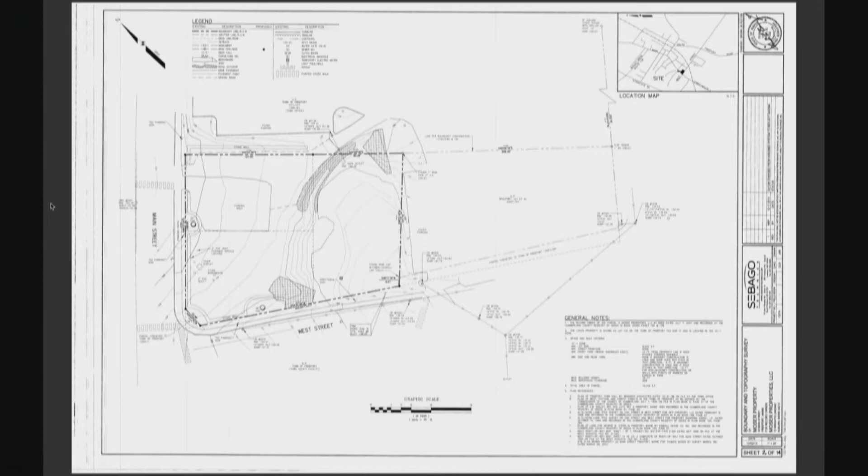There currently is no entrance off of West Street, but that's where we are proposing on that. So essentially we got some physical features shown here. Next slide, if you don't mind, Josh.

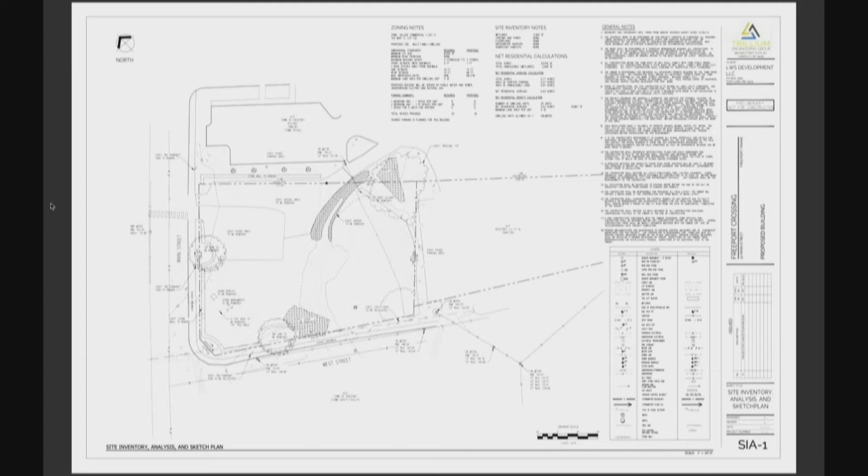So this is our site inventory and analysis sketch plan where we go through the calculations. We have our general notes, and again we're showing a little more features on this and going through those calculations that were really asked for this. But a lot of them, as Caroline said, don't really apply for this particular as far as open space. So next slide, please.

So what we're showing here is essentially the building, and we have the street presence that Paul was talking about. We are meeting the setbacks on the town hall side and the setbacks on the West Street side. Of course, we're meeting the setbacks on the Main Street side. We have some good connection points that go out to the sidewalk on Main Street, and we're also trying to get some connection point out to West Street.

We have our main entrance on the front corner down here, which we're trying to get a ramp, integrate that with the existing stone wall, and get access into our main lobby area. We also have the internal parking area and courtyard that is not really visible from either West Street or from Main Street. We're trying to hide that.

And of course, we have a sloping site, so we have everything level that's up on Main Street. And then it slopes as we come down, and we have kind of a daylight basement section here with an extra unit, and also some bike storage, some mechanical space.

We are utilizing some entrance points on the courtyard side, which is kind of the main entrance lobby area, and also to this portion of the building. This section of the building, which faces Town Hall, is essentially we're utilizing tandem parking, which is underneath this section, and then we're utilizing units on top of that. So the units essentially wrap on the three sides that surround from West Street, Town Hall, and from Main Street.

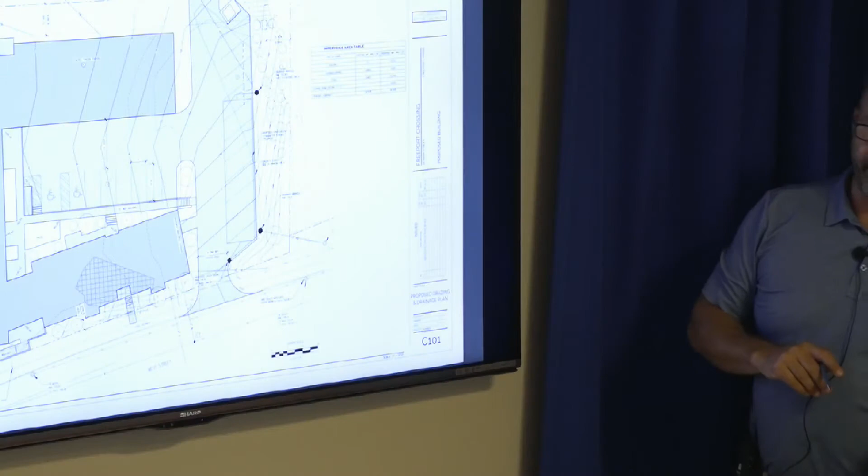The one-way access that we were talking about, we noticed in the report from Town Engineer Adam Bliss that an entrance permit is required. We've already secured that entrance permit, so we're in good shape there. It takes traffic away from Main Street, which is more congested than West Street, and it's really one-way traffic, which helps us out as far as stacking, and we don't have to worry about interfering with the light as much. It's really a left turn in, that's our biggest concern, but otherwise it's a right turn in for entrance, and then we go through that easement section, and be able to exit down and through the way we exit out Town Hall as we currently exist.

We do have parking and then some trash storage on this side, so that it's pull in and then back out and then be able to pull in.

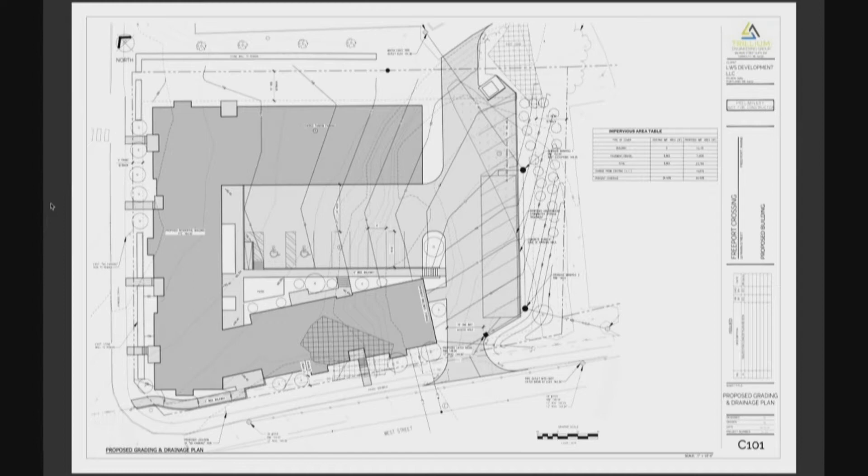We have some slopes here, and then, as we noted, we need some stormwater quantity and quality, so we're going to utilize some basically underground storage under parking and be able to connect into the town system. We're not going to release at rates that are over what they are now. We're going to discharge at the same or less rates than what we're looking at, and we are going to get treatment from that system.

We are doing utility connections essentially from West Street - water, sewer, electrical - and of course we're going to continue to work on landscaping for the project to meet those landscaping goals. So from a site civil impact, I think that kind of covers it. I'm going to turn it over to the architectural team.

There you go. It's on.

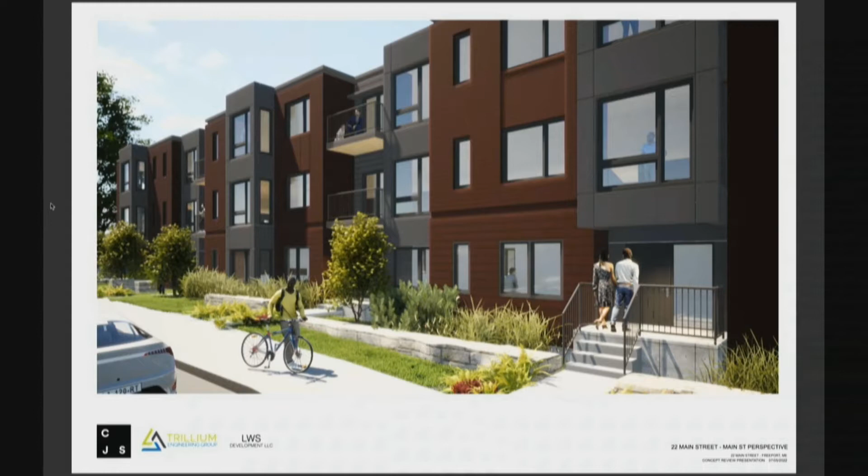This view is close up, looking down Main Street to the north. It's a view you would see from your cars, and from the all-important thing that Paul mentioned. We appreciate his commitment to walkable neighborhoods and dense urban cities, and that's what we're really emphasizing here, because this is the way you'll feel it. You will get some long views of it, but this is why we start here.

From an urban standpoint and urban design, which I have a background in, that street wall is all important in holding a corner. As well, it turns out that at this site, this really kind of marks an entry, and so we're trying to be very careful with that.

There's a trick that could happen here. There's maybe, in my opinion, a hole we could fall into quickly of emulating too much a historic downtown, and then it starts to become kind of corny and faux. Or we could go to the other side, and it starts to become too modern and stand out like a sore thumb. We're looking for a balance here, and we feel like we're on our way.

These are very beginning images. The balance we're striking here really has to do with not just building a long wall. You'll find a lot of 19th century buildings like this around Maine that are apartment buildings. They might be clad a little different, they might have a lot more ornamentation, but they have bays sticking out, and the roof lines jog in and out. You can begin to see that, in your ordinance, you rightly call out that you're looking for rhythm, and architecture certainly has a lot to do with rhythm. So that's what we're beginning to show here.

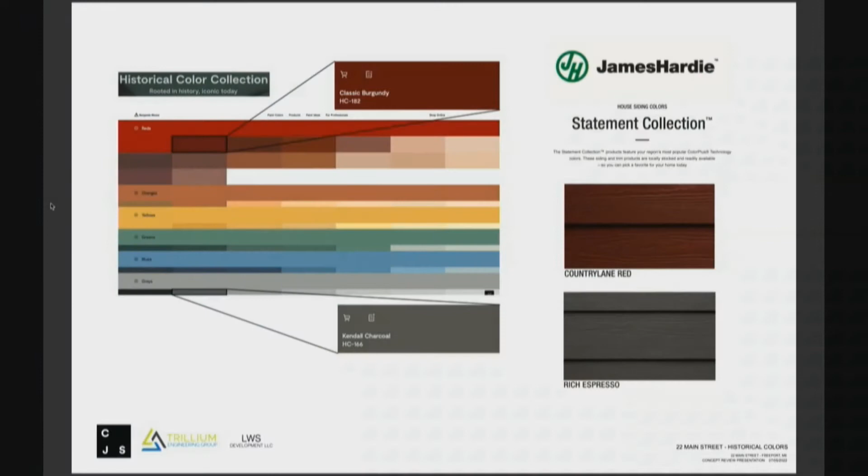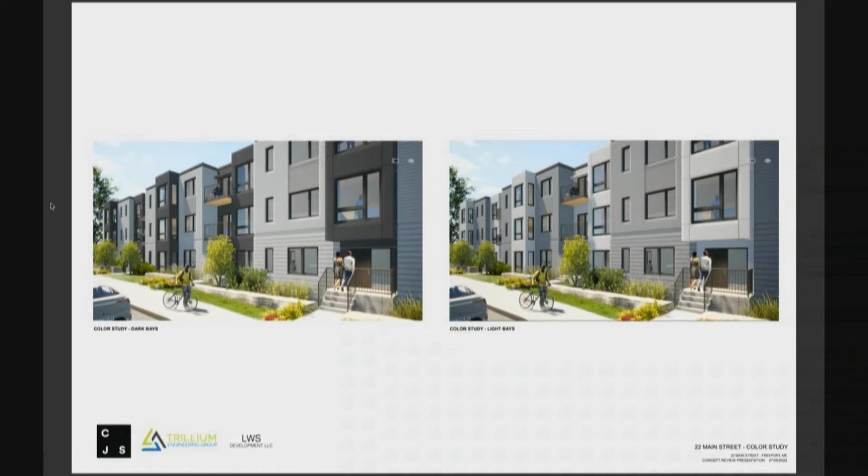This slide shows it all in gray, and we can have plenty of discussion as to what looks better. One of my favorite buildings is the Abacus building - it's brilliant white. I pictured that on this site, and that would hit you in the face really hard. I'm thinking it might be better muted rather than very foreground. White comes to the front, darker colors recede. From an urban standpoint, this is a background building, where Town Hall or L.L.Bean is a foreground building. So I'm thinking put some background colors on it that help it recede. Plenty more discussion to come about that.

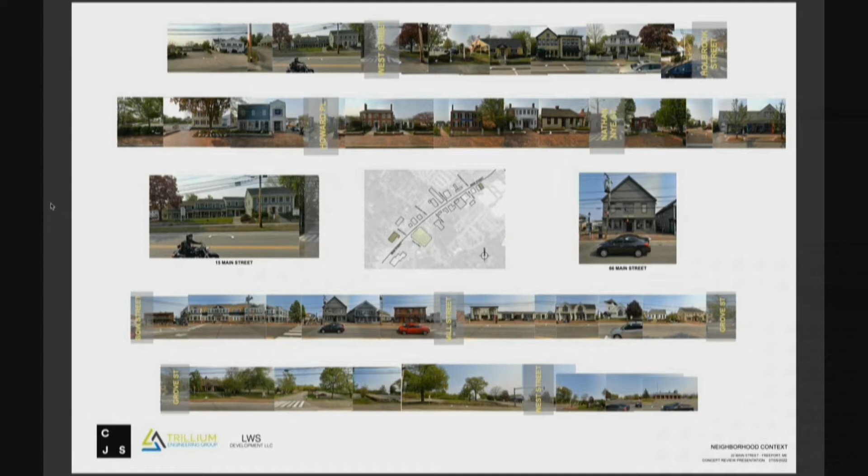Here's a study of what else is on the street. You can see historic flat roof buildings of 2 stories, and I believe some historic flat roof buildings of 3. You can see pitch roof buildings, and you can see these darker colors. This building - I don't know if that might be where Levi's was, I'm not sure what's there now - has the kind of tonality I picture, where it kind of fades to the back a little bit. It's easy to make it look too dark on the screen, but that's something similar. We've been studying the different facades and how that will relate to this.

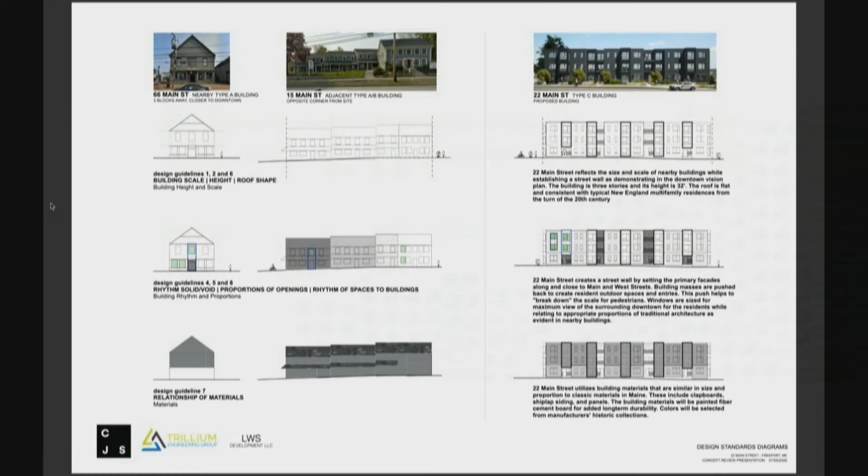Here's an architectural analysis of how we develop rhythm, how we develop the different types of fenestration, what's forward, what's back, how we break up the facades. So we're in that process, and feedback from everybody will help us continue that and make sure we're delivering a building that enhances the main street the best we can.

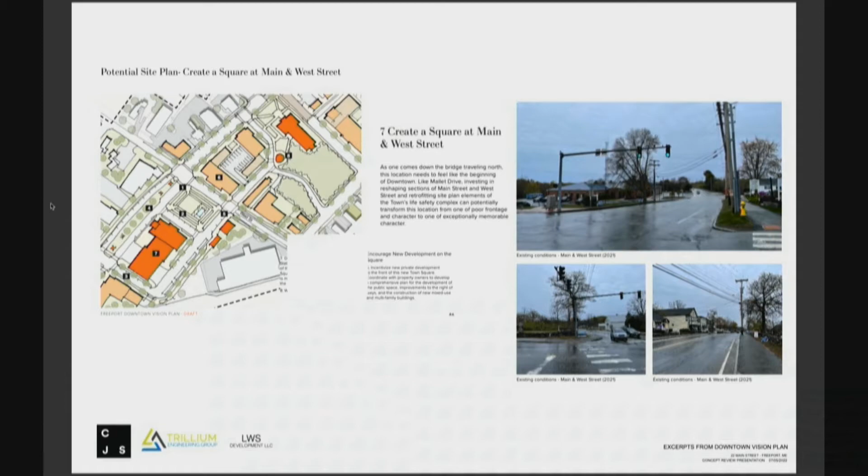This is from your own master plan, showing the building as an L-shaped building addressing a park, and we're aware of that and being careful of it. It's an interesting building in that there's only one facade that's really almost invisible from the street - 3 other facades will be quite visible. That's an interesting aspect that I think just makes it more fun. So, that's it.

And I'm assuming we're opening it up to comments. We'll look to the chair for that. I think we'll have some questions and comments. We'll start with the board.

I think what we'll do is similar to how we dealt with the last multi-unit project last month. Because there are three different reviews—subdivision, site plan, and design review—we'll go through each one, ask questions related to that one before moving on to the next. So we'll start with subdivision, and I'll start with the board here, and then we can ask Jason in hybrid mode if he has any comments. So, questions or comments with regard to subdivision ordinance?

With respect to concept. Concept, exactly, with respect to the concept. Nothing. Does Jason have any questions or comments with regard to subdivision? No questions from Jason on subdivision.

Okay, thank you. Conceptual. Okay, any questions or comments with regard to the site plan? I have one question. Yep, go ahead.

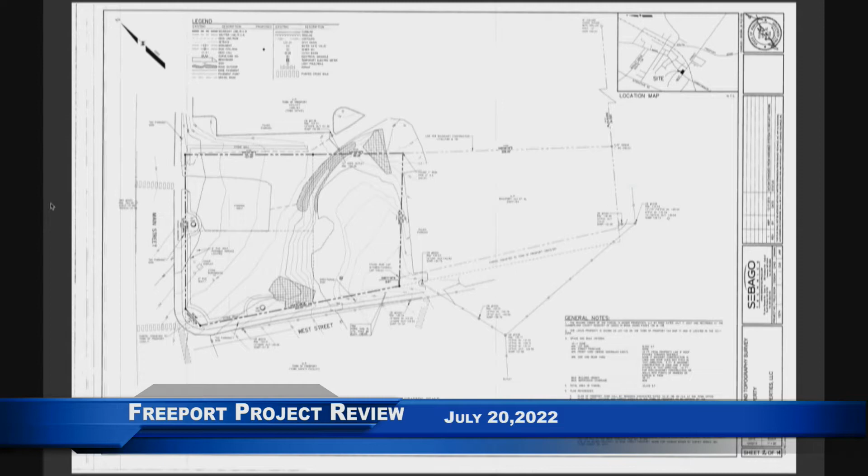So the questions we're really talking about are from, actually it's funny, there's a drainage system that happens basically from this catch basin, which is from the town parking lot. So what we're really talking about is runoff that's created from that culvert, and then it connects into the culvert that drains out of West Street. So when we're talking about wetlands, we're not talking about significant wetlands—we're just talking about wetlands created from a drainage way or drainage swale. So, to answer your question, those will be covered by parking area and slopes.

Right, so without me having—I don't believe you have a picture of that area that's adjacent to the town hall parking that comes out on West Street. Is that correct? This is going to be where, on what am I looking at? S1A1, where it says existing paved parking area. That, I believe, is one of the town hall parking—it's not owned by the town, it's actually privately owned. That lower lot on the side, it's that area abutting that. Okay, yes.

So from that area to the property line, that's where all that heavy tree growth is right now that you can see when you go down West Street? Yes. So I would be interested in having a better look at what's there.

I have never kind of been in that area myself on foot or anything, so I'd like to understand what's there, because it seems like you'll be removing or redoing what's there—that existing wetlands or treed area—and I'd like to understand what it is as far as where the parking and your drainage and all is changing.

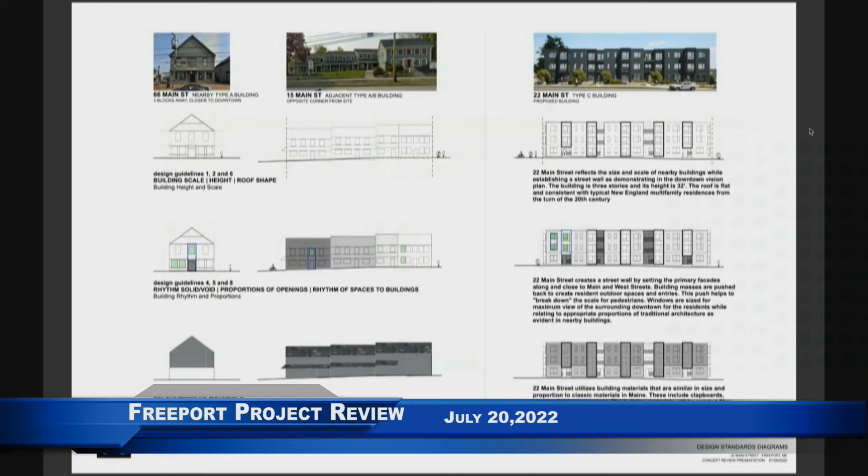So let's go vertical. The adjacent building's overall facade has vertical pieces, like the one up in the upper left. So let's make sure we orient it in a portrait way instead of a landscape way, because we could just go overall landscape. It's the big moves of vertical versus horizontal. A typical Main Street building is 35 to 40 feet wide, not 200 feet wide. So let's break it up into those and start to develop a rhythm there. And no Main Street buildings have a big long cornice that just runs for 200 feet.

So let's make sure that breaks up. But at the end of the day, financial viability of a project does depend on scale. There's no way around it. So we do have to deal with that scale problem. And then it's our job as architects, if we're building a big building, how do we make it work?

And the word I read is compatible, right? Unfortunately, I am not a lawyer, but compatible is a fairly subjective term, especially when you're referring to those first pieces. For me, compatibility recognizes the antique by giving it something that the antique can be recognized as antique, and the contemporary can be recognized as contemporary. If the two mix, to me, they're not compatible. What you've done is created a confused discourse. But compatible, what's compatible? That's what I read. I think when you hired this group to write this ordinance, that's their intention, and they often take that from the National Park Service that deals with most historic districts.

Thanks. Any other comments or questions from the board? I've got a couple comments. Yeah, sure. Recognizing that compatible is kind of a discretionary term.

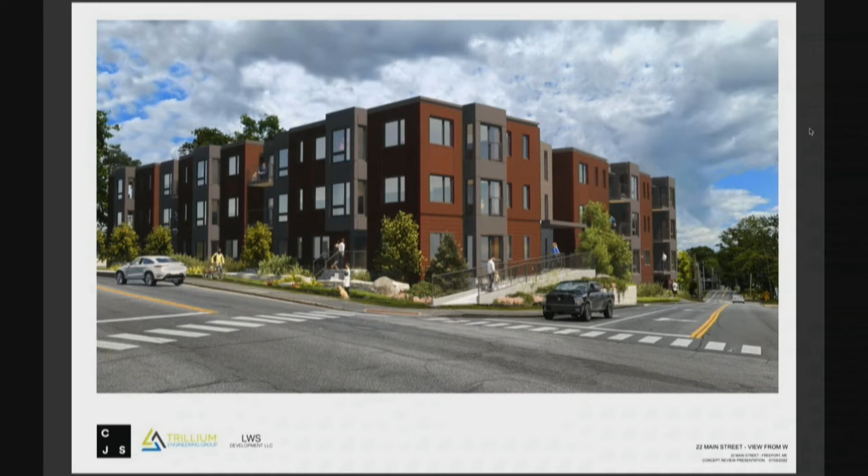If it's a background building, that corner has 3 apartments in it. So those are not foreground civic spaces, those are people's apartments. And when you hold a corner with a big foreground building next to a town square, traditionally that's a church, that's a city hall, that's a school building, that used to be like Mason buildings and that kind of thing. Traditionally speaking, apartment buildings in traditional towns are background, so they don't make a huge statement. They let the fire station, the park, make the big statement, because this is just somebody's house. But you could push back and say you want us to do a big statement here.

I think you might be misunderstanding what I mean by a statement. What we're talking about, for example, is the building halfway down Main Street, I think it was the old library that used to be the Clark's store. It's got that rounded front. That's not a big ornate thing, but it's something that draws attention to a point. And that's a beautiful corner. I think it warrants attention being drawn to that front corner. That makes sense, and that's a beautiful background building. I agree.

To continue, just visually from this, what I'm seeing is a lot of concrete. I'm seeing the walkways, the ramp going up. I'm seeing a lot of metal industrial type railing. That's what it strikes me as. I'm seeing the four walkways off of Main Street. Again, I'm not seeing something that I feel is consistent with the rest of downtown, going back to the old library, for example.

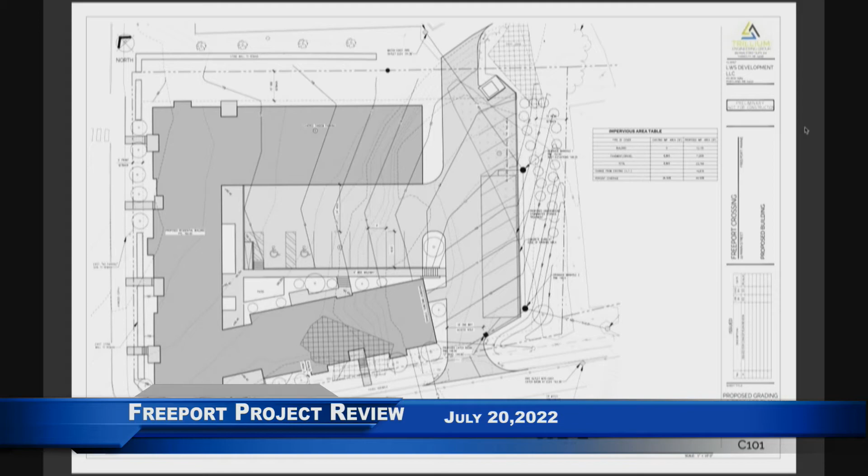I do have one question about the plan. Can you put that up there? I'm unsure, where is this property line? Is it the trees? Do town employees park right here right now? Yes. Okay, thank you. Thanks.

Are there any other members of the public that wish to speak?

So, my name is Peter Enzweedy. I don't live in District 1, so it's not as painful to me as it is to someone living on West Street. But I wanted to give you a couple things. One is, you know, it's a struggle, and you all know it's a struggle between getting apartments and meeting the return on investment components of any project.

But I believe that, as a member of town, I totally agree with your idea about scale. Those units in that corner, I mean, I thought that having the market in that corner was a lot. Now you're putting a 200-foot building in that lot, and I think that's way too big for that lot. The second component, though, is that when I saw your picture, I think of Portland. When I drive down to Portland, I see the university dorm rooms, exactly the same style you're trying to do. Now you've differentiated it a little bit by pushing the building in and out, but oh my God, that's really a frightening look.

And the third piece was balconies on Main Street. I think they would add value to the apartments or the condos. However, if you take a drive down Route 1 in Yarmouth, you'll see there's a couple apartment houses on the left, and there's all kinds of things that go on those apartments and those balconies. So I'm not sure that over time you wouldn't get some additional things you'd have to manage. Thank you.